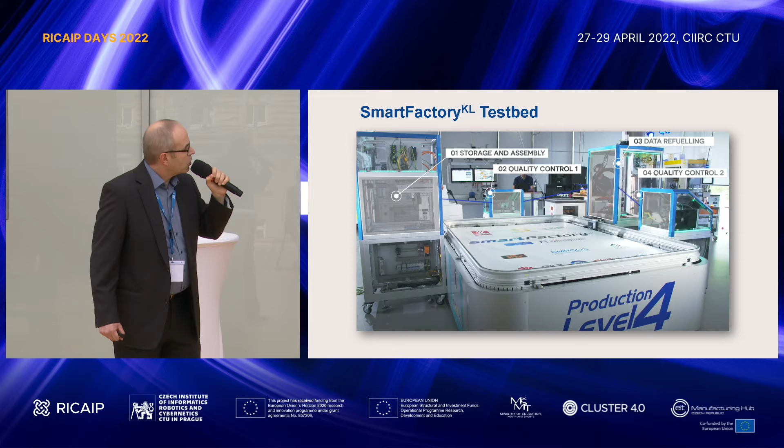This is an example of such a production island. This is also shown on Hannover Fair. This is production island Java, which consists of a number of production modules and a conveyor system. The production modules have some functionalities for storage, assembly, quality control, and data refueling. Furthermore, they're providing some plug-and-produce facilities in order to have flexible interchange of modules.

In the same way as we have modular hardware in the system, we have also a modular software system, which will be developed in the framework of the European project MAS4AI. We have partners from Saarbrücken and from Kaiserslautern in this project. And the idea is that we distribute software components on several levels, on layers of the system.

For example, we have some control components on the modules. These control components have some skills which can be provided to the system, and these skills are integrated into software agents which can be combined in a flexible way.

So we can autonomously control the specific modules, and we can also integrate additional capabilities for enhancing the system with artificial intelligence software, for example, for cognitive support or for predictive maintenance, monitoring, reconfiguration, and so on, on the module level or on the factory level for planning and decision making, for example.

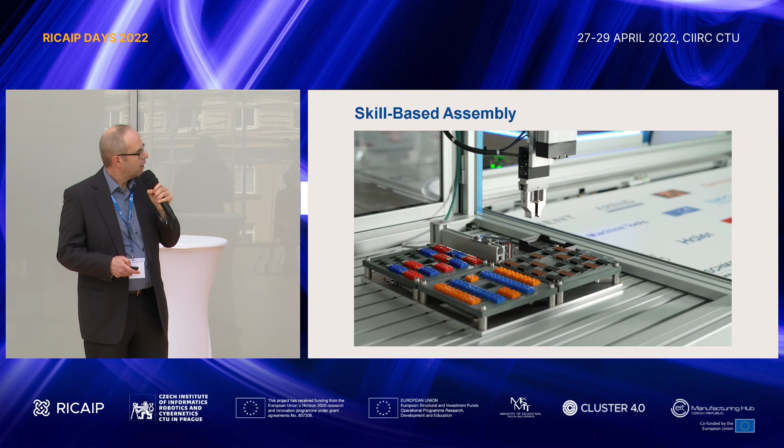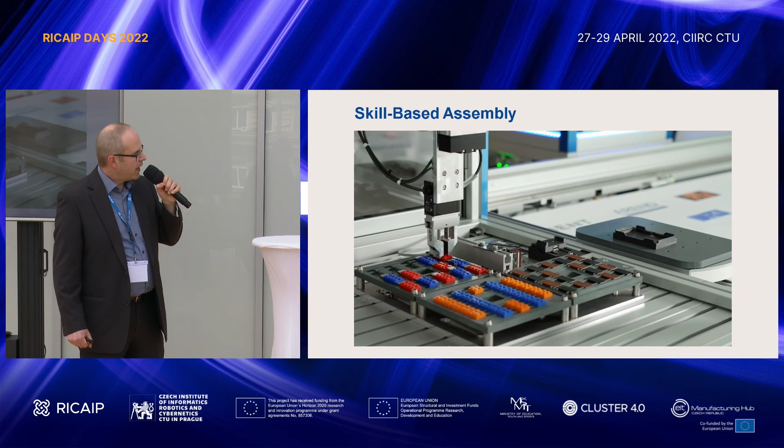Now, this is the example of a skill-based assembly. This is one module for assembly. You see the Cartesian robot with a gripper, and there are some skills provided by the system for moving parts, say pick and place, for assembly, and also for interacting with the shuttling, the transport system. That means the modules can call the shuttles if they need it.

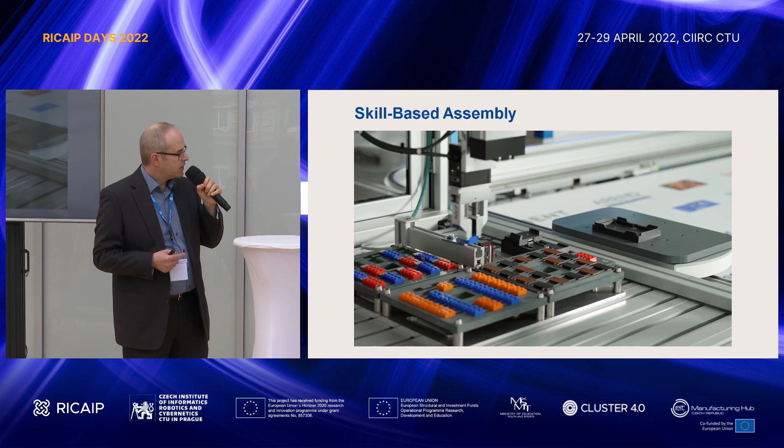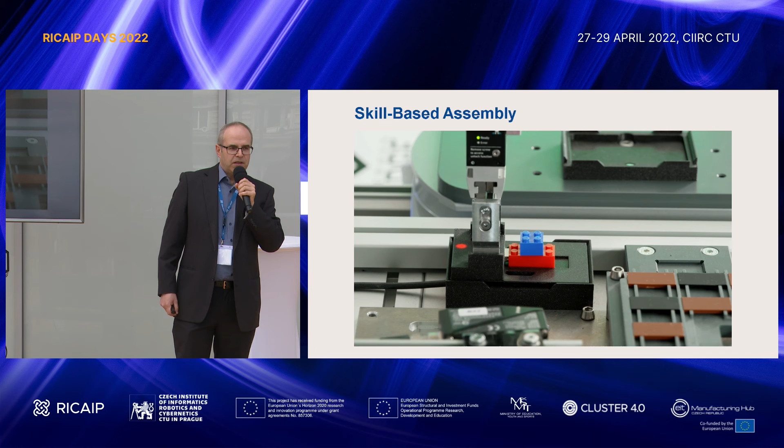The advantage of this approach is that the programmer or application engineer does not need to program the single trajectories, but can access the skills and just get the parameters to the skills. In this way, it's much easier and requires much less effort to program such robots.

Okay, this is the example. And I'd like to conclude. I propose the concept for controlling distributed production networks as a whole with a multi-agent system.

The basic idea behind it is to use industrial standards in order to enable interoperability between software and hardware functionality. Then I showed the integration of software functionality and AI agents. This is also possible, and we have some first implementation of this system.

In the future, we will work mainly on patterns for specific agent types, which are very common in industry, in order to make them available and to have reusable components in the future.

Secondly, we will work on the integration into several manufacturing systems, and this may also be possible to use for interacting between the locations of Saarbrücken, Kaiserslautern, Prague, and Brno, for example, and others. This would be a nice development for the future, and I hope we can do that together.